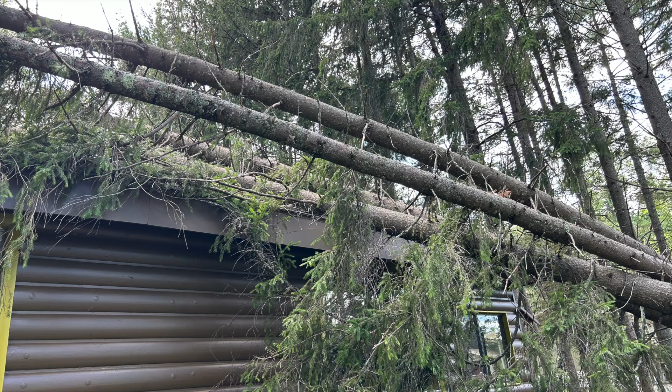But before we get into all that, I just want to start this slideshow to kind of show you how we've used this space in the past and really kind of what the feel is like up there. So a couple summers ago, a big windstorm came through and actually knocked a bunch of trees down onto the property. And this building was already pretty fragile to begin with. It's just an uninsulated crawl space. The cabin itself was actually two small fishing cabins that got sort of sandwiched together with just a roof built on top.

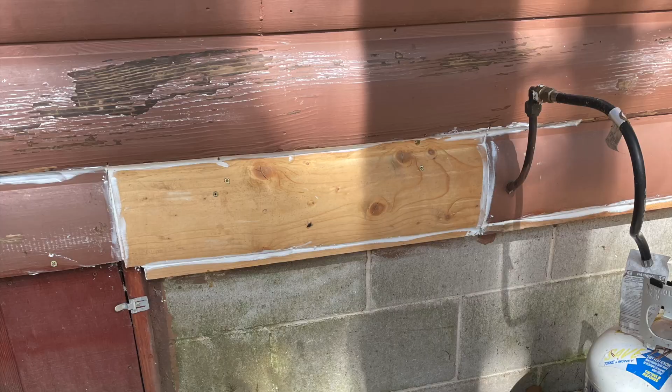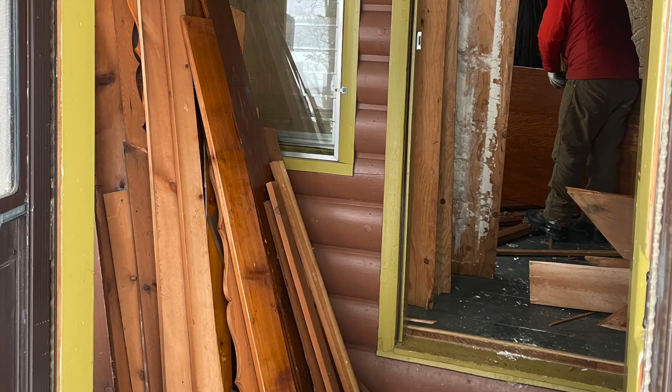So after those trees fell, it really was like, do we really try and patch it and limp along, or kind of think about the dream vision here? So my parents decided to do a whole rebuild, and it's funny because actually the summer before we spent quite a bit of time fixing up the siding and repainting everything. But oh well, we aren't wasting the building. We're trying to save all the trim and paneling, the stove, and anything we can incorporate in the new design as well. So that's kind of what you're seeing in a couple of these photos here.

But like I mentioned, it's been in the family for 25 years now, and we just have a lot of memories up there. It's a really, really special place to us. We usually do a big 4th of July gathering and bring extended family and friends and stuff, and yeah, we've really kind of grown into that space. So bringing sort of a second life to this property is going to be really exciting.

One of the other things that's interesting is that the lake we're on, Oswego Lake, is actually a loon sanctuary, so there's no motorboats. It's just mostly canoes, kayaks, paddleboards, and things like that. So it's relatively peaceful and quiet, and yeah, we really like the space up there. We get some really beautiful sunsets too.

So this property really is all about the outdoor spaces and kind of feeling in touch with the North Woods. So that's really the vibe we're trying to bring. A little bit of that camping vibe, but having a nice, well-built, cozy home there. So, yeah, keep taking a look at some of these photos, and I will hop back to the plans on page 1.

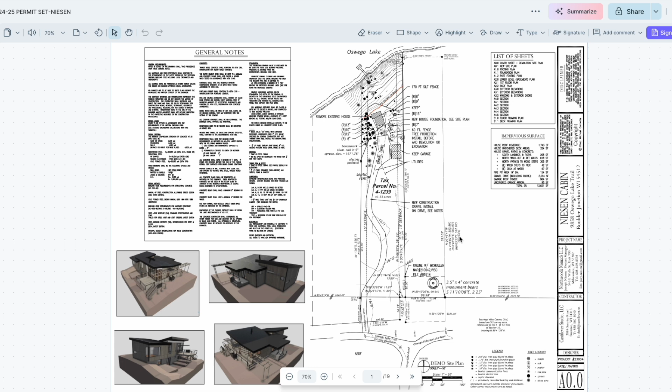All right, so here we are on page 1, and we worked with this really awesome designer, Cantilever Studio, and Chad Cornett helped us put together this really cool set of plans. So I'll walk you through some of the detail and how we landed on some of this stuff. Here on page 1 you can see this is our lot, and it's pretty narrow, kind of a long skinny lot, and it intersects our water at almost a 45-degree angle, which is sort of interesting.

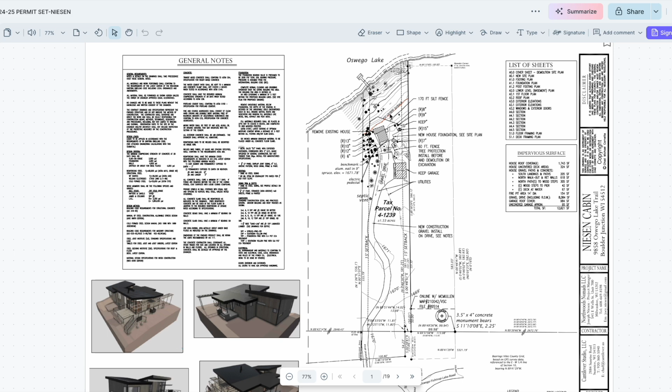But you can see here's our driveway sort of snaking through. We've got a 2.5 car garage on the side here with a bunkhouse for some extra sleeping, and then at the end of the driveway is the main house. We've got 15-foot setbacks on each side, and then a 75-foot setback from the lake. I'll zoom in a little bit. You can see we've got even our fireplace located there. And I'll scroll over to these notes in case you want to read. I won't walk through it all, but

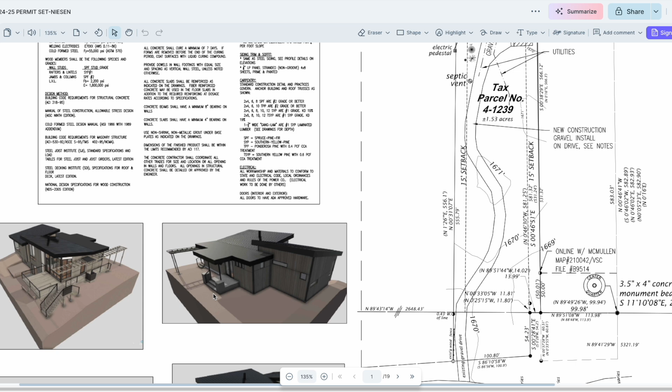at the bottom of this page, we've got some renderings as well. So this isn't really the final color scheme, but just kind of the shape of the building with these low slope shed roofs. You can see the big pergola here and the big deck. All right, let's keep moving on here.

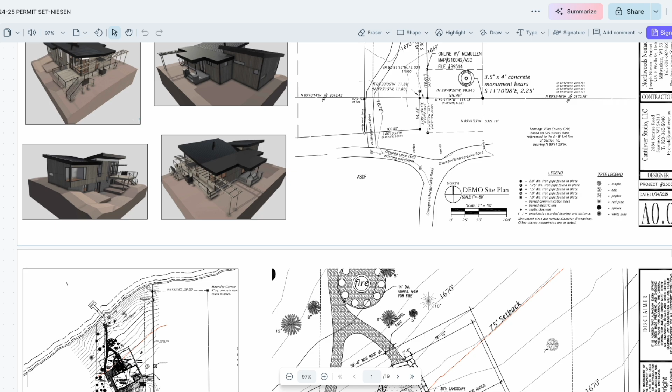On this next page, you can really see the outline of the building, this footprint here, and this dashed line is the old cabin. So traditionally we used to have a path that kind of went along this west side of the building to enter over by this vestibule here, and one of the changes now is that we have this big covered front entrance here at the front of the building. We still have an entrance on this side, but it's really more like a kitchen entrance to this grill area, and then we have another door over here to get out onto this deck.

But the big change here is we're going almost twice as wide, and then we're also digging down for a walkout basement. So still kind of that cozy feel. It still feels like it fits the lot, but definitely a lot more usable space in there. And then another thing to note here is that because of this walkout basement, the grade here, the elevation is definitely quite a bit lower than on the sides in the rest of the house here. So we do have these landscaping retaining walls kind of shoring up the soil there for that walkout basement.

Another thing to note on this page actually is we've got this big 20-inch oak tree, and we even have notes in the plan to try and limit excavation to help save this oak tree. We had an arborist come up and clear a few trees for the new house, and he also assessed sort of the risk of the other trees and took down any diseased or rotted trees to try and prevent another windstorm from falling a bunch on the roof. So talking to him about this oak tree in particular is kind of neat.

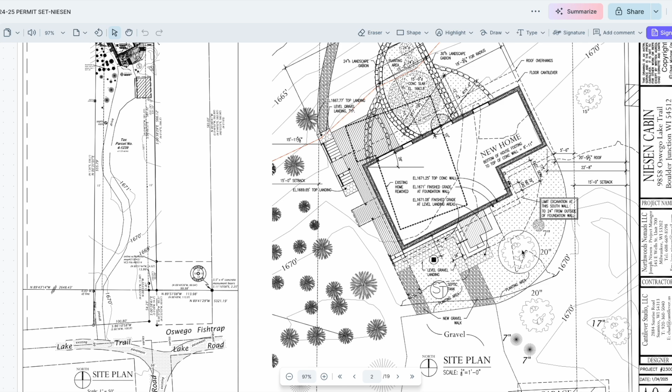So this tree was a double trunk tree, and the trunk that's actually closer to the house had been cut down a long time ago. So the existing trunk is a little bit further away, and it's also leaning away from the building. So we feel like it's relatively safe to keep. And then the arborist is actually going to be there as we excavate to help trim any roots and assess this tree as we go. So worst case scenario, if it's not safe or if something's going on, we can still cut it, but hoping to save it if we can.

All right, so this next page here is our footing plan. So this is kind of the outline of the building. It's not quite a rectangle. We've got this little bump in here, but this is showing our strip footings. And the strip footing part is, if you look at this detail here, the strip footing is the bottom rectangle section. So kind of like this section in the plans.

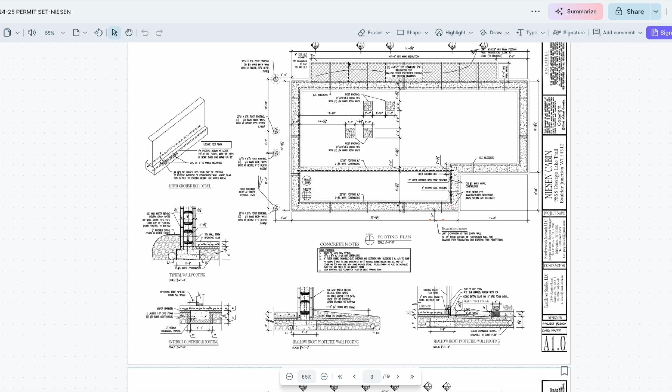And what else is going on here is, on this side here, we've got what's called wing insulation. And the reason for that detail is actually because on this walkout basement side, the footing is not covered with 4 foot of soil to have that natural frost protection. So we are actually putting this insulation down to help prevent driving frost from getting down to the level of that footing. And then we've also got drain tile circling the perimeter here, and these little chutes are connecting the drain tile system together, and then we've got a sump pump here to expel any water that gets into that system as well.

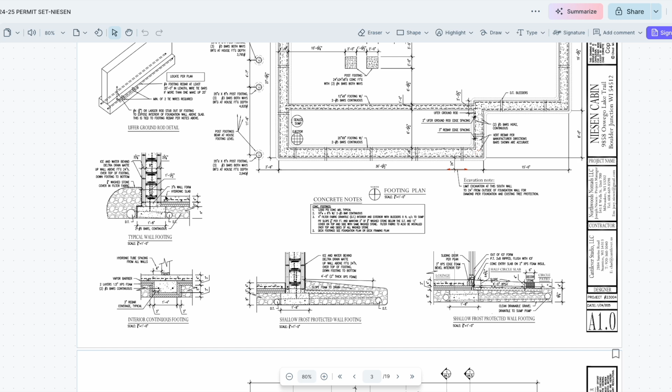So taking a look at the cross section, in this detail here, you can see that insulation is sloped away from the footing here to help drain any water and really to prevent that frost from driving down. And then what's interesting is we're using this system called ICF for our foundation, and that stands for insulated concrete form. And it's really cool because it's almost like Legos that you can stack on top of your footings. They sort of click in place, and then you can tie them together with steel ties, set rebar inside, and then you can brace them all from the inside and then pour your concrete.

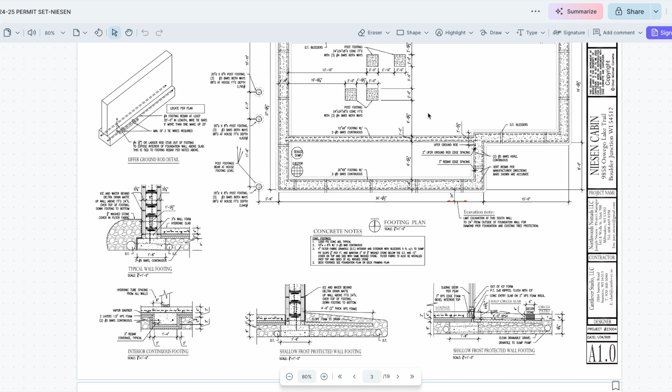You can see this footing right here is for a load-bearing wall above where that roof pitch changes, and we've got continuous insulation underneath that footing. Under the slab here, we've got 3 inches of insulation as well, and it's really cool. This slab for the basement is actually going to be heated, so it'll be a hydronic radiant heat slab. So there'll be water tubes running hot water all throughout this slab to heat it up. Which is a really nice detail.

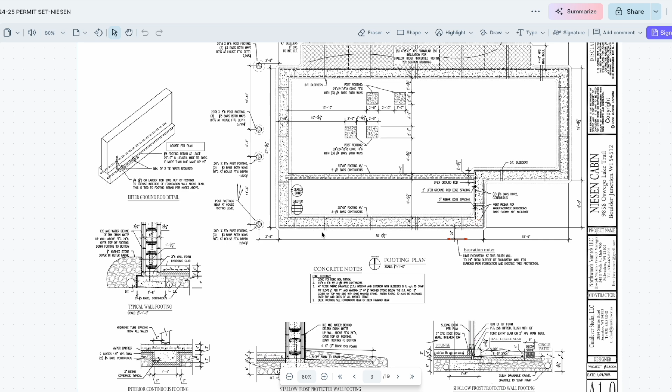All right, here on this page, you can see a little bit more of the foundation detail. So now this perimeter is showing our ICF blocks, the top elevation of our ICF blocks. And one of the things that's really nice about this plan is our footings and the top elevation of our ICF blocks are all at the same elevation. So there's no step ups or step downs for the footings or anything like that, which really helps reduce the amount of bucking we have to do to kind of shore up the sides of that.

We still have to do it at the window openings and the door openings, stuff like that. But the other thing is that when you have to step up and step down using ICF, you have to slice one of the blocks to meet up with the other row, because you'll never really have perfect 16-inch different footing elevations. So one of your blocks is going to have to be sliced so that they can still click together perfectly, like Legos essentially. So having everything at the same elevation is a really nice detail, and it's going to help us build this a little bit more in a straightforward way.

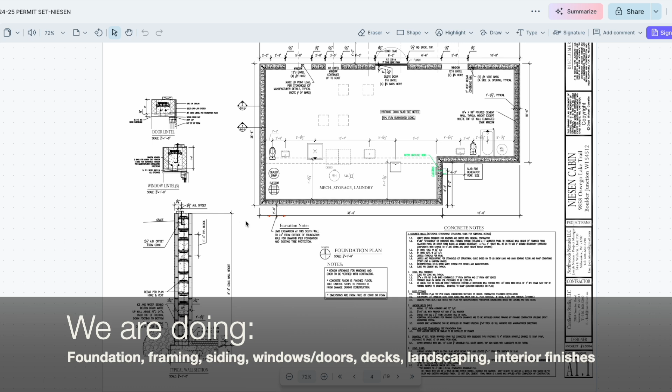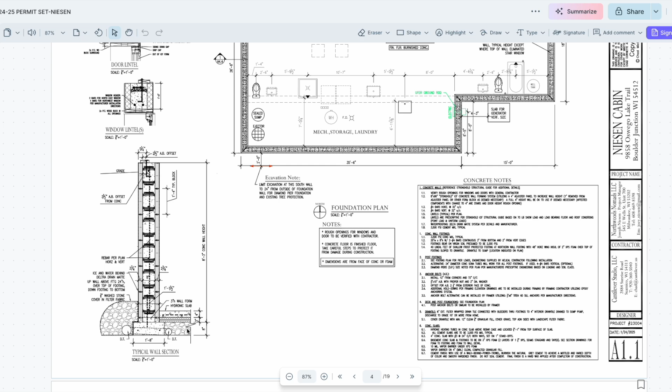For this project, it is really mostly me and some friends building a large portion of this project. So those kind of details, thinking about the construction and especially the details in this plan that Chad's put together. He shows everything, like anchor bolting our sill down. Even in this section detail, you can see we've even got the rebar chairs, rebar, hydronic tubing, the drain tile, everything is really well spec'd out, which is going to help us quite a bit.

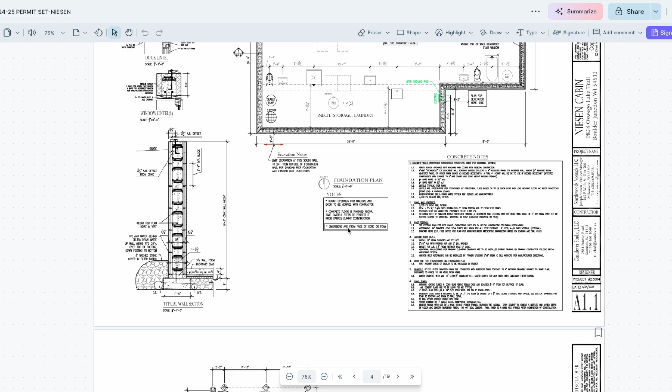The other thing in this plan is you can see we've got dimensions for all of our plumbing rough-ins for that basement slab, which again is a really, really helpful detail. Makes things easy and straightforward. I'll zoom in on these concrete notes if you want to take a read real quick. All right, let's keep moving on.

Here in this plan, this is the post footing plan. So again, this is our foundation outline. And then all of these over here, these are different footings for posts. And we have two different kinds going on. These circles are for sonotube footings, or sonotube foundations. They're basically a hollow cylinder form that gets put over a footing, and then you add some rebar, some concrete, backfill, and that's essentially how you build these sonotube footings.

But these more rectangular ones are called diamond piers. They're a little bit more like a precast deck block where you put them in place just on grade, and then you drive stakes through to prevent your frost and uplift and stuff like that. So we're mixing the two different post footing styles, because we think these diamond piers are going to be a little bit less invasive for tree roots. You don't need to excavate quite so much, and maybe a little bit easier to install for me and my crew up there. So we're trying to use those where we can, but sonotubes are a little bit more traditional and a little bit higher capacity where they're really needed.

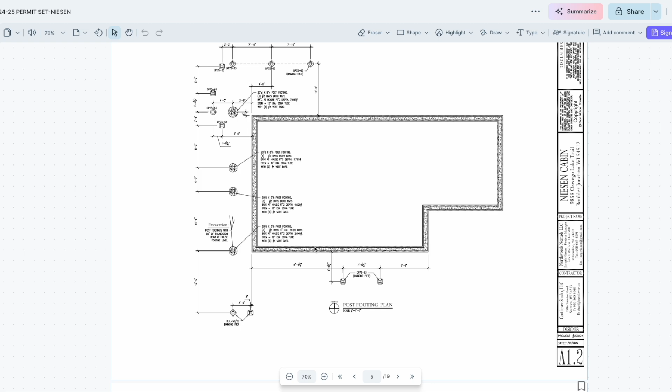All right, and here we have the lower level floor plan. So a lot of detail going on here, but you can see we've got 2 bedrooms in each corner. Each bedroom has a window facing the lake. We've got the big walkout basement door. This is a sliding glass door right out of the lounge here. And you would actually enter this basement here on this side of the stairs and come into the lounge area.

We've got 2 bathrooms for each bedroom, and then we've got a washer dryer area and a kitchenette, a little craft table, storage under the closet. And then this area over here is just a mechanical room. And this whole area can actually get walled off with this track wall, which is kind of cool. And you can see a little bit more of those post footings for our deck and stuff over there too.

This wall here is that load-bearing wall for where that roof pitch changes above. So there'll be big headers here, a big header over the washer dryer and stuff as well. And then I think this is actually the biggest header in our building here, the one that goes over that walkout basement door.

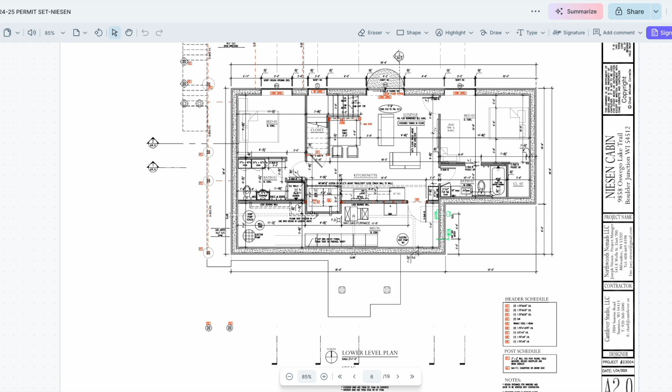Let's keep going on. And then this is the main level floor plan. So a lot of stuff going on here, but we'll walk you through it. So let's start over here by the covered entry area. So this entry has steps on this side and this side, and that's kind of the angle that you would sort of approach this, I think, from the driveway. It's coming up over to this direction.

And part of this entry is we've got a big bench seat here as well, which is really cool. And one of the cool things is that the decks are connected by this little bench seat as well. So this sort of top step continues all the way over and connects to the other deck as well, which I'll show you in some more detail later.

But coming into the building here, we have this little entry kind of mudroom area, and we've got some bench seats, some places to store coats, and then this little half bath. So the idea here is this is sort of to replace... We had an outhouse. Well, it's still there as of the time of this video, but it won't be once we start building. But anyways, this area is really to kind of replace that outhouse. We call it the moho, the modern outhouse.

But anyways, the idea is this space really is about being outside and being sort of connected in the North Woods. So having this easily accessible without having to go way far into the building is really important. So you can kind of come in, charge your phones, grab your coats, whatever, do your business, and hop on back outside.

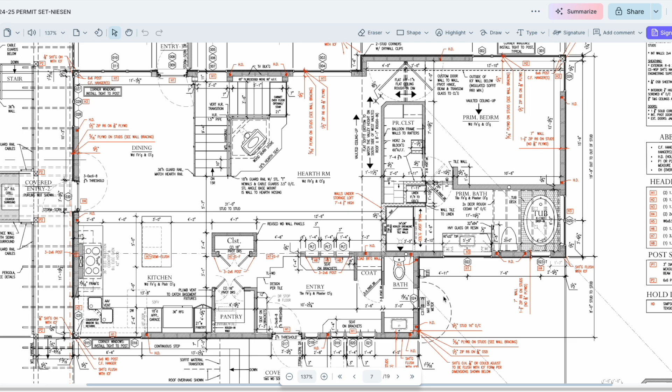But then coming into the master bathroom over here, we've got this walk-in shower, our vanity, tub, a toilet. And the ceiling here again is pretty high, so we've got these decorative beams kind of over the tub area too, which is pretty cool. And then this detail down in the corner is a little bit more of that loft above the walk-in closet.

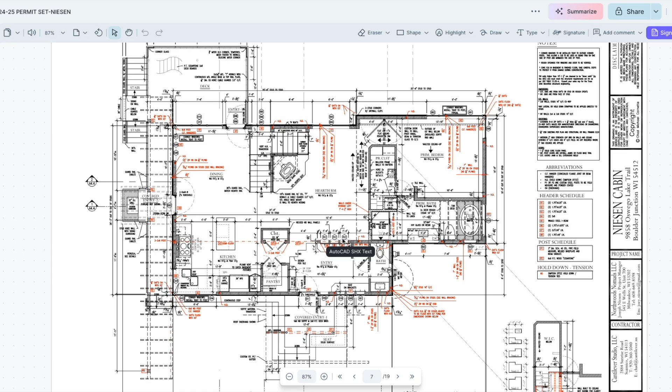All right, let's keep going on here. All right, this next page here is really kind of like the bird's eye view. So these two big sections are a low slope metal roof. This flat roof section is just kind of like a rubber roof, EPDM. And then this is cool.

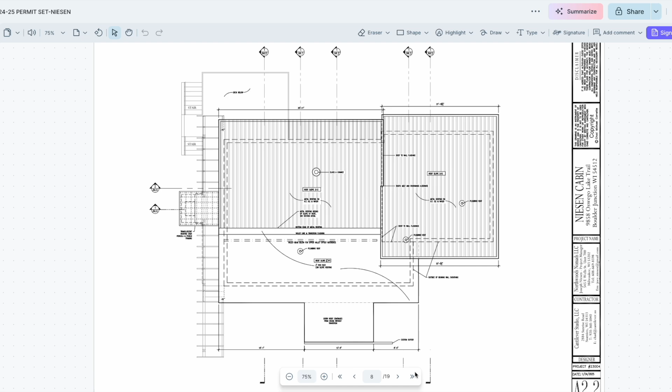We've got a translucent glass roof over that grill nook area, kind of just attached to that pergola structure. And this is that pergola that's on the deck walkway. This is that chimney vent coming through the roof, and then these are plumbing vents. All right, keep moving on. All right, here we go.

All right, now we've got some of the elevation drawings, and this first one is sort of like what you would see from the driveway side. So like the kitchen is over in this corner with the sink kind of looking out these windows. This is that covered entry with that bench seat right in here. And then over on this side is where that master bathroom is. You can see kind of that pergola structure a little bit, that grill nook area.

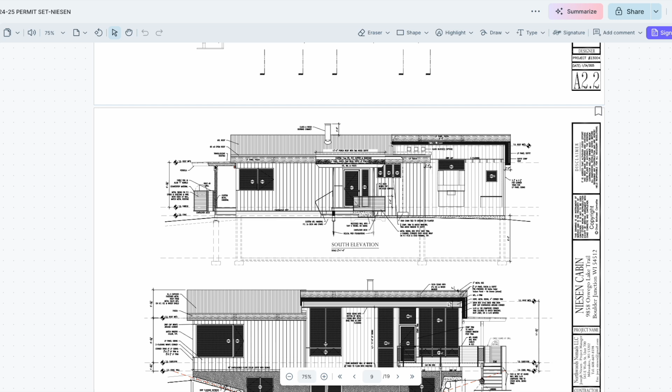And yeah, I'll zoom in a little bit, but we've got this big custom gutter here with a rain chain, which is kind of a cool detail as well. And then this is that bench seat that continues, that continuous step. You can even see some of our basement details here. So like this would be that ICF block foundation, the basement slab, and then like this is, for example, one of those sonotubes.

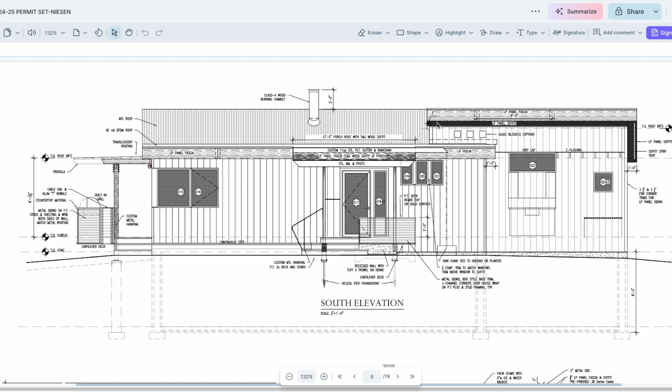And I'll talk about it a little bit more later, but this is a big 14-inch wide fascia made out of LP wood grain panel, which is really cool. It's the full thickness of our roof rafter system, our TGI joist system.

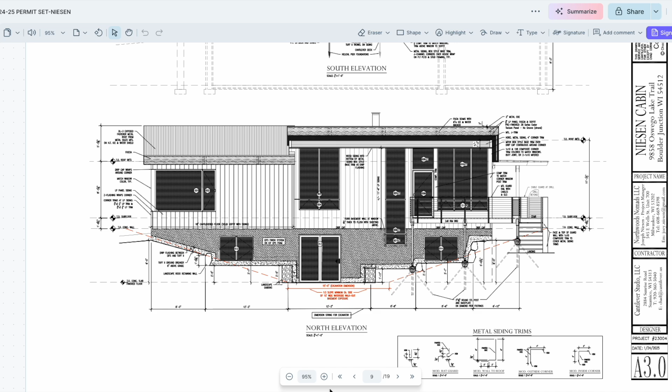And in this plan, yeah, you can really see kind of that cable guardrail system here too. So one of the really cool things about that is it doesn't really obstruct your views too much, so you can see through it. Get some really nice views as well. And we've got the stairs kind of heading down, continuing that path down to the lake. And then here you can really see, these are those diamond piers where you can really see those stakes driving into the soil there as well.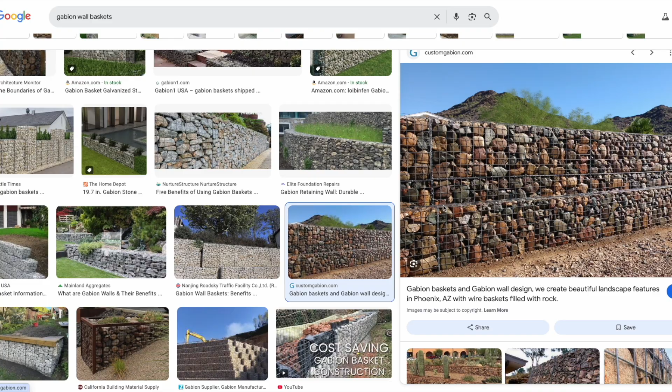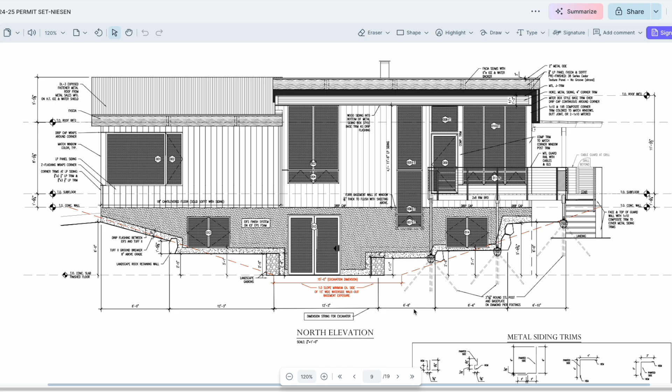So it's really cool, but the plan for us is to fill the bottom and the backside with debris from the old cabin, because we're going to have some leftover concrete block and stuff, and so we can fill the bottom and the backside with that stuff, and then fill the top and the front with more decorative native stone and stuff. All right, let's keep moving on here.

Yeah, and this is the elevation where you can really see how bold that big 14-inch fascia looks. It's a really cool detail. I really like it. And then this elevation, the west elevation, is like the dining room kitchen side. So we've got this door leading out to that grill nook, and you can see this is that big pergola structure with that glass roof above that grill area as well.

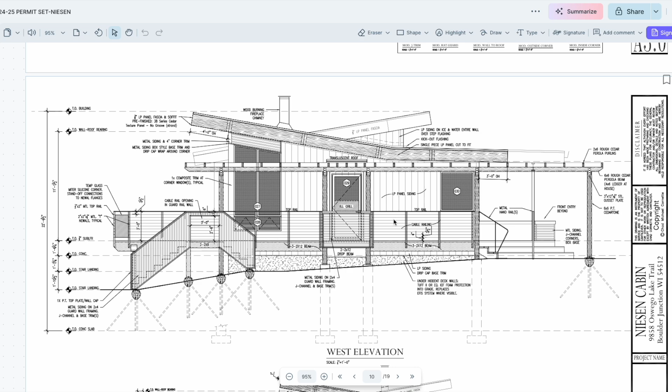Yeah, and just as something to mix it up too, the siding throughout here is T111 style wood siding, which is really cool. I think that'll feel really nice and feel like it fits up north. But we have a couple small sections that are actually metal siding, and we'll just use the same metal that we use for the roofing.

It's like this little section above the roof. We've got this section, the stairs, covered with metal siding. This section by the covered entry. And then you can see again, these are those sonotubes and these are those diamond piers with stakes.

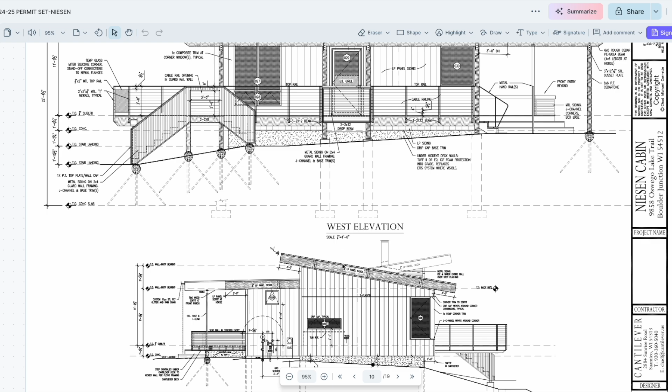Yeah, let's keep moving on. And then this is that west elevation, or I'm sorry, this is the east elevation down here. Kind of like if you're looking from Jim's property, if you're familiar with the property up there. But this is like the master bathroom and master bedroom side, basically. And then we have that little bump out, if you remember the shape of the foundation, where we're bringing in our utilities.

And one of the really cool details that our architects thought through is even just connecting our Z-flashing with the top of the windows and getting that layout correct. So it lands on top of a big panel. The windows are at the same elevation, and we can just flash a continuous horizontal line there. Some of those construction details a lot of people maybe don't think through, but if you can think through it from the beginning, it really helps the process. So really appreciate that. Chad really did an awesome job with the detail here.

And then this is that cable guardrail system. You can see the steps going down to the lake, and this is kind of what I guess from this view the landscaping will look like as it heads down. Roughly, just showing grade and stuff. That rain chain for the gutter over here.

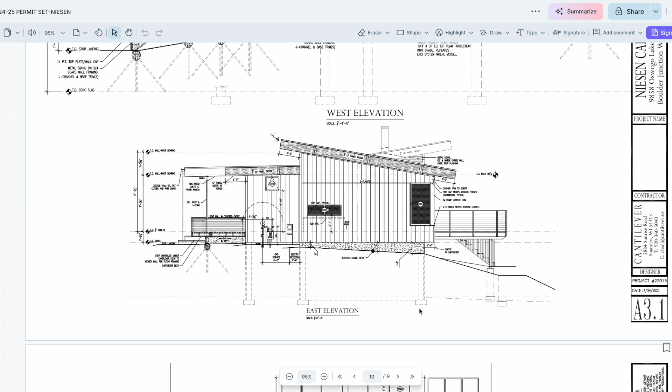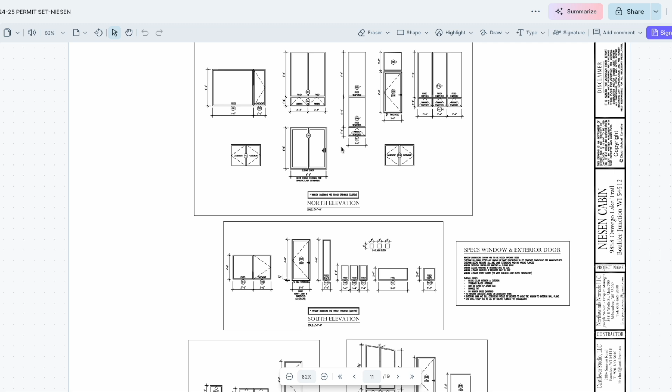All right, and this is our window schedule. So we're using a fiberglass series of windows, the Marvin Essential line, and yeah, we're really excited. There's a lot of really cool casement and operating windows. There's a couple of really big banks of windows that we'll have to mull together before we put them in. So they're going to be way too big for us to just manhandle. So we're going to need a lift or a winch to get them up in place, which should be really interesting, but it'll be a fun day for sure.

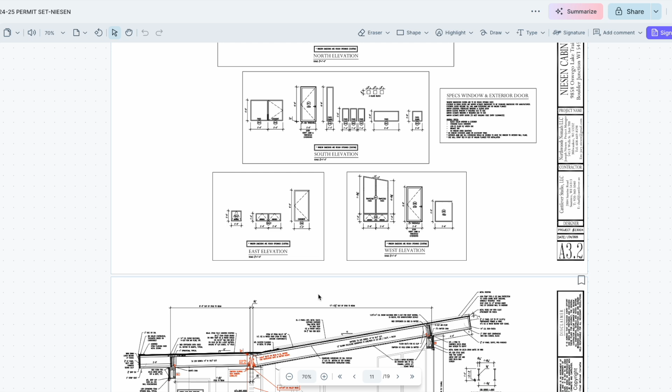All right, and these next 3 pages, I believe, are all from this east elevation. So as if you're looking at the property from Jim's place, but these are sort of section drawings to show the internal components and some of those details. So I'll try not to get too involved with it, but I'll walk you through some of the stuff that I think is really cool.

Yeah, so we'll start up here with our TJI roof system. So these rafters are a TJI 230 series at a 2/12 slope, so a pretty low slope roof, and the ceiling actually follows that slope. So we want to get insulation in this cavity, but we also want ventilation up there. So what we're doing is a BIBS system of insulation, which is called a blown-in blanket system, and essentially we staple like a cardboard material to the bottom of this top chord.

So these TJI joists are made with a top chord and a bottom chord. So if we staple a material to the bottom of the top chord, we can get insulation up tight to that barrier while still maintaining some airflow within that top chord cavity space. And you can see how that's spec'd. We've got airflow kind of continuing down here. Let me zoom in a little bit. And even where we have blocking, we cut V's in there to continue that airflow. It's a really cool detail.

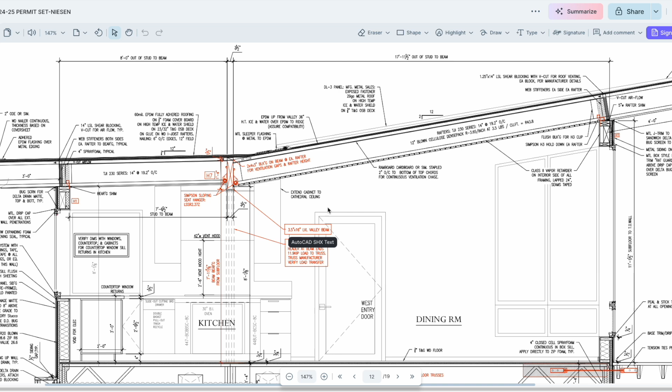And our walls will also be that BIBS system. So let me show you a photo of what that BIBS insulation looks like. Yeah, so essentially this is the blanket that they'll staple on the bottom of those joists, and then you basically blow in cellulose until it reaches a certain density for your insulation rating.

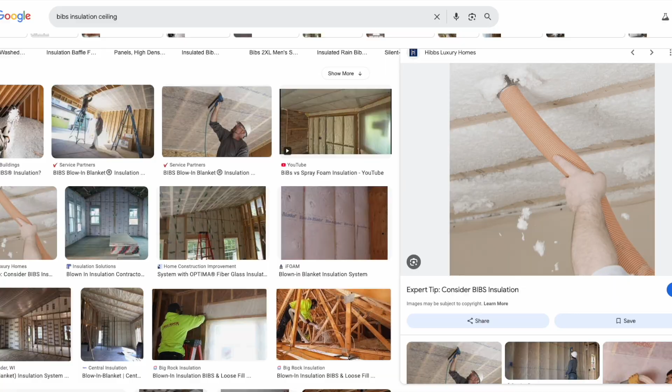We've got a beam up here to hold the structure where that roof pitch changes with some hangers spec'd out, which is really nice. Our floor system here is a web truss system, so we can hopefully get some mechanicals chasing through there. You can see some ducts that are drawn in there. We'll have spray foam for our box sills where they sit on the foundation to get that nice and airtight.

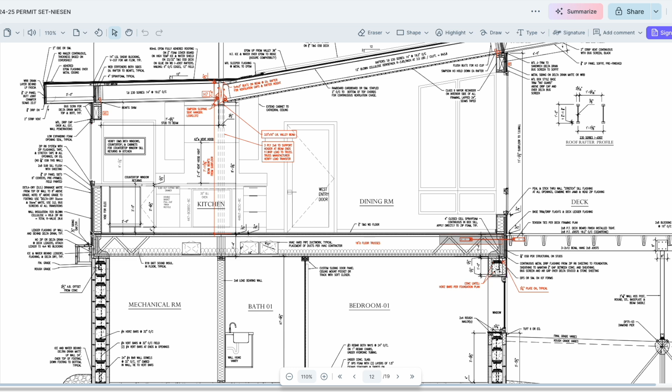This is that continuous bench seat here. You can see that detail a little bit. And this detail here is what's called a tension tie to really hold our deck tight to that building.

Again, here you can see our ICF foundation wall, and you can see some really good detail here for our basement slab too. So 3 inches of insulation on top, our continuous footing with insulation underneath. We've got these chairs holding up rebar, and these tubes are actually the hydronic heat tubes running through that slab.

This is that load-bearing wall coming down to that footing to support this big structure up above. And yeah, a lot of good stuff going on. But let's keep moving on.

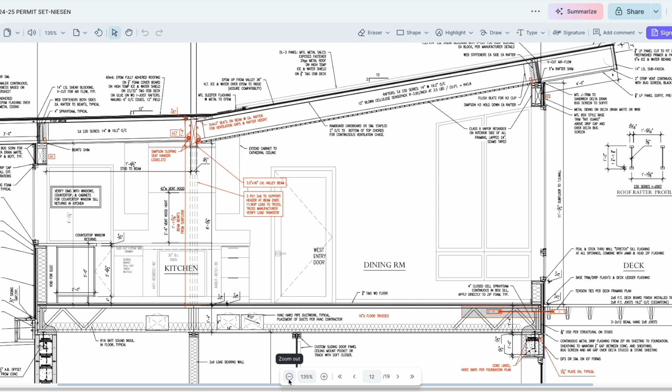Similar section drawing, we've got the stair opening here, so you can see this intermediate landing and where the angle of where the stairs run changes a little bit. And we've got the really nice guardrail system here that you can see through for the most part. And some more details about some various headers.

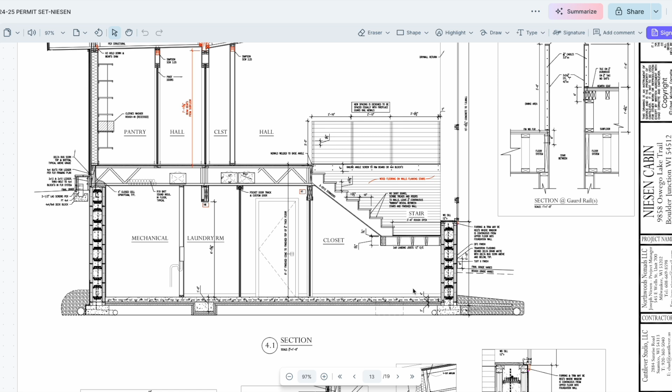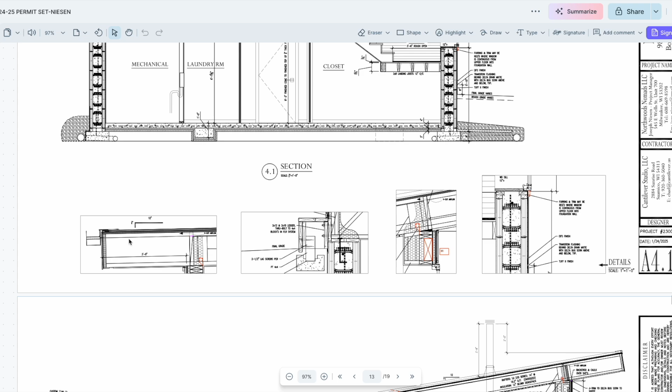That wing insulation detail again, some of our ICF. A little bit more detail for that bench seat. This is that bench seat detail as well. Some more detail for header. And I just love that everything's drawn, even just rafter ties for holding our ceiling system down. Let's keep going on here.

So another section drawing. You can see a little bit more detail for the bench seats in that entry area. You can see what that covered entryway looks like with a diamond pier here. Again, trying to be minimally invasive on this side to help with that oak tree over there too. That tension tie holding that deck on.

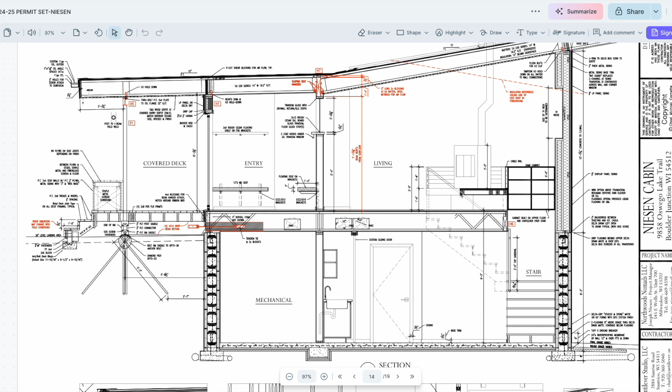And up here you can see we've got this game cabinet at the top of this stair landing, which is kind of cool. So whatever you're doing, you can always come down to here to grab something, or up to here. Just a nice little detail. This is kind of what that chimney is going to look like.

And then here we've got a recessed niche for a TV to be stored in there. So it's definitely not the focal point of that hearth room, but you could pull it out and watch a game or whatever if you want to up there.

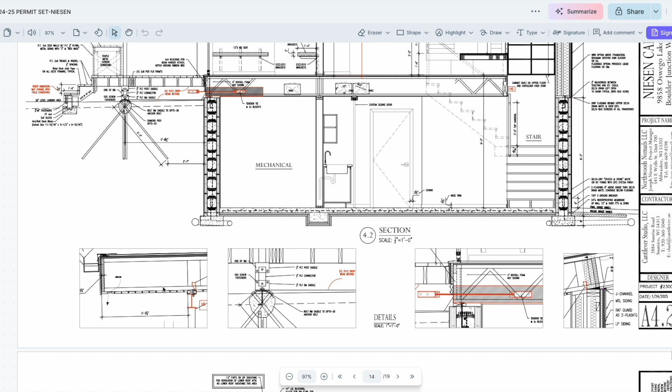A lot of really good details down here. There's that tension tie. Here's how you'd anchor a sill into that diamond pier. This is a connection for our I-beam. We do have a steel I-beam supporting this covered deck area over here.

Alright, and another section drawing here. This is a little bit more for that master bathroom, master closet. This is that half bath actually. If you remember, this area of the building is further back than this area because of that bump in, but we can get all the detail here in this section drawing. So this is that tiled walk-in shower, and these are those stairs up to that loft above.

And this is that really cool custom pivot door. We're gonna make that out of salvage material like paneling and trim and stuff from the old cabin. And then we've got this transom glass above, which will be really cool.

And another little detail here is to get a little bit more room in that master bedroom, we are cantilevering the floor trusses a little bit over the foundation. We didn't want to overcomplicate the foundation. We wanted to just keep a simple shape. So rather than changing the footprint of the foundation, we're just cantilevering these joists over. So there's some good detail for how to insulate that too. Even more detail there.

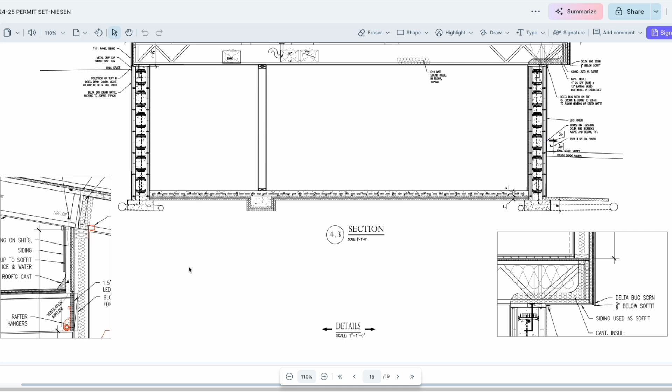And then this detail over on the other side is actually to show how to waterproof and flash this area over here, where this shed roof overhangs the low slope area. Definitely want to make sure that's well built and flashed correctly.

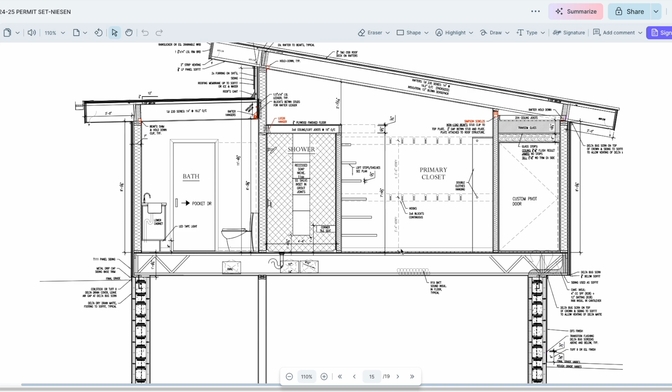Zoom out a little. And then, yep, this detail shows a little bit about that pergola structure and that grill nook area. So it is interesting how that grill nook is cantilevered over quite a bit. So there's some details on how to do that. Some sister joists here with blocking. Really detailed, really good ledger attachment here for the building with through bolts.

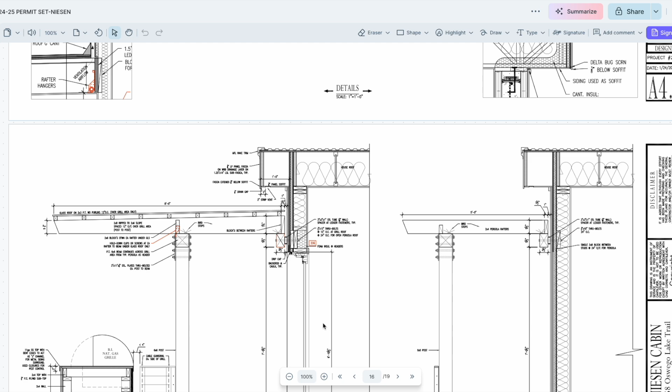And same with up here, we've got a really detailed, really good ledger attachment for what's going to be supporting this pergola structure, and some 2x3s here, which actually span the pergola rafters to hold that glass roof for the grill area. And you can see here, this is also some detail for the shape of that metal roof above, the corrugation.

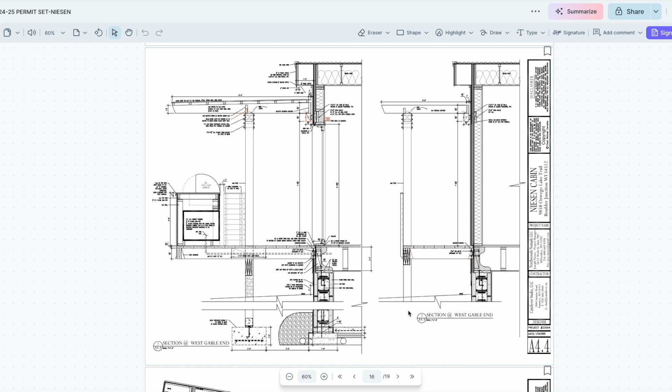Alright, let's keep going on. And then this next page here is another cross section. So I just really like that Chad called out some of these details. Even this dashed line here is where the other roof intersects, the roof that would be behind this section. So he called out this detail to make sure we insulate this wall, I think, because below this other roof is going to be interior to the building, but above it is an exterior wall, so we want to make sure we definitely insulate that and get things good to go.

Yeah, you can see a little bit more detail about, like, this is that bathroom, linen closet, vanity. This is that lower level bathroom and that lower level bedroom. The cantilevered truss system there. Then over here, this is a big header detail right over that walkout basement sliding door.

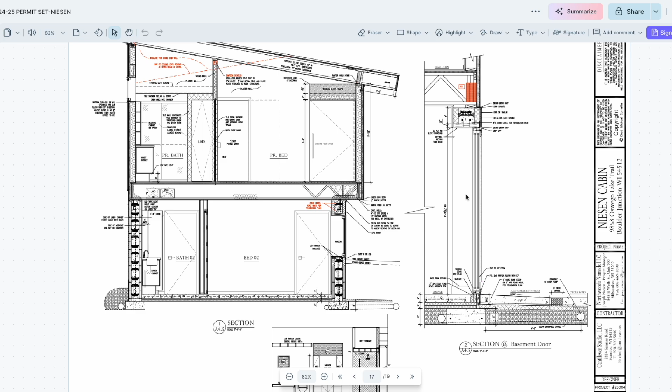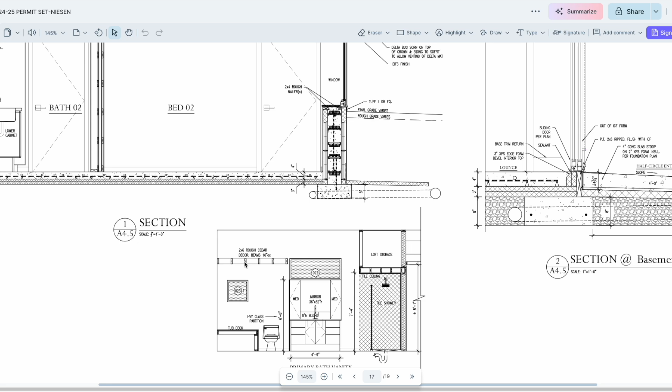And still on this page here, I'll zoom in a little bit, but this is what that master bathroom will look like. That tile shower, that storage loft, vanity, window, really nice mirror here, and then obviously our toilet and the tub here as well. Then we've got those decorative beams that span the room as well.

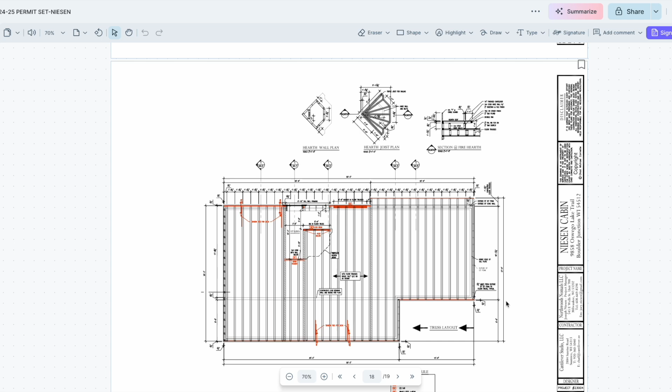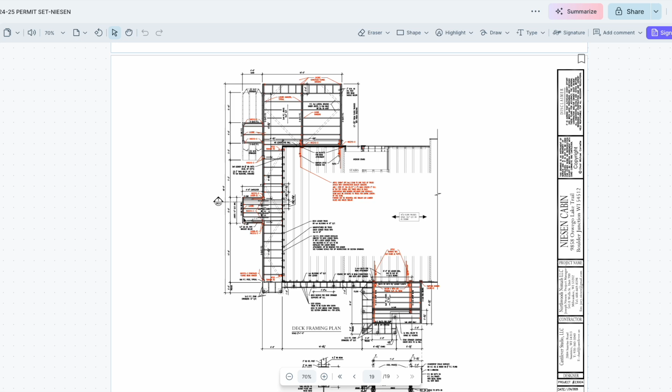And I believe these are 19.2 on center rather than 16 on center, just because we're planning on using real 2x deck boards instead of 5/4 boards. And honestly, I think we're just leaning towards the cedar tone pressure treat stuff that you can get from Menards. Honestly, I'm not a big fan of the Trex deck and some of the composites. It feels a little bit plasticky to me. And I just think the actual wood is a little bit more of that Northwoods feel. So I really like that detail, and it will age a little bit.